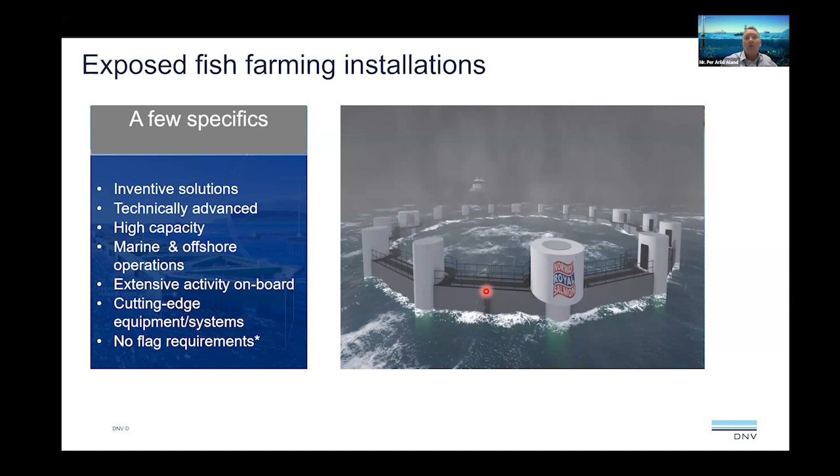Just to set the scene more firmly, let me share the main categories of these new solutions we see being brought on. It's convenient to split it into 3 categories: open, semi-closed, and closed. The open ones are framework made of steel, with net panels to enclose this and keep the fish in one place.

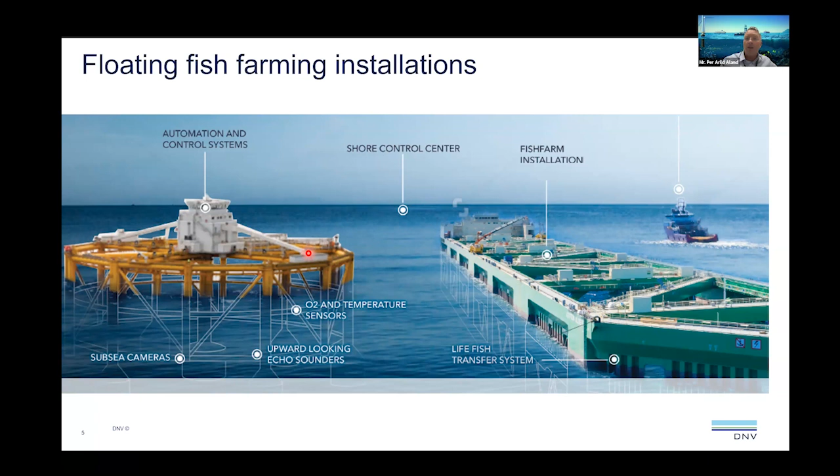Our main focus is split into 3 main areas: the asset integrity of the installation itself, the health, safety and environment of the people working on board, and last but not least, preventing fish escape - fish control. What we've seen to be very efficient is implementing the well-known maritime safety regime and execution model, very often called classification, a methodology we've seen work very efficiently in oil and gas and regular shipping.

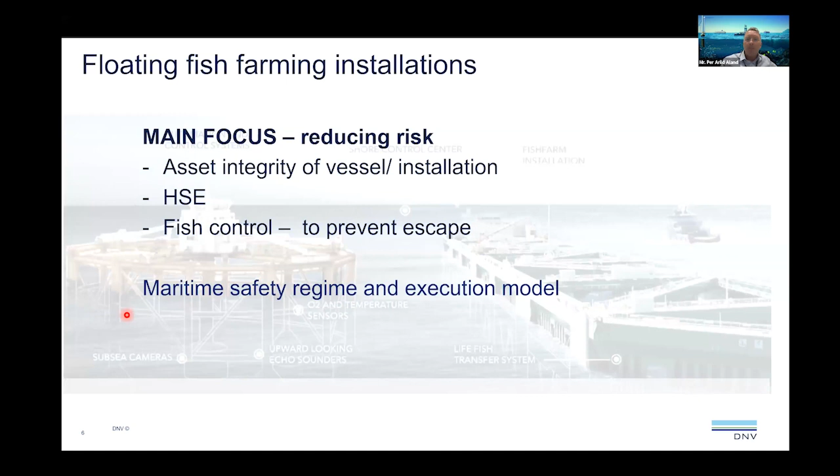To go into more detail on these 3 categories, let me highlight a few main points. Number 1, installation and the unit itself. Several of you may recognize regular items from maritime classification, such as structural integrity, stability, mooring, machinery, and electrical instrumentation installed on board. Both DNV and I believe other class societies have prepared a rule set - ours is called the floating fish farming units and installations. The magic number is 0503, which is basically taking all our experience from the last 60 years of offshore maritime operation, condensed and tuned for fish farming into an 80-90 page rule set that has shown to be fairly successful in the industry these days.

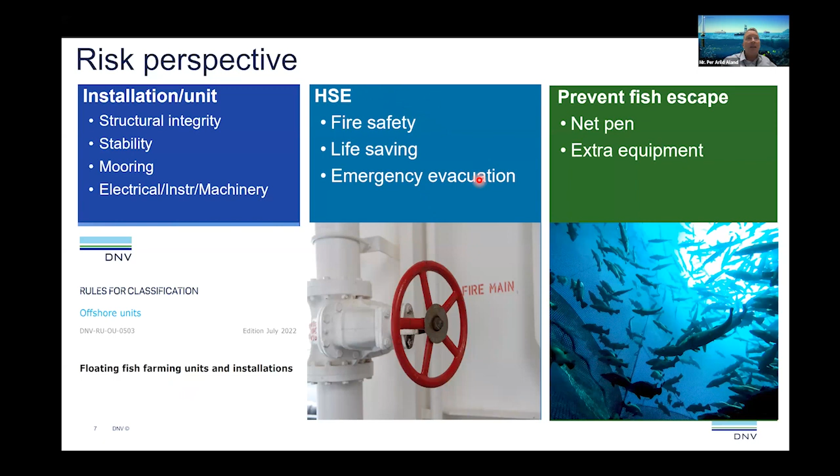The next one, HSE, which covers fire safety, life-saving, emergency evacuation, and other crucial HSE items for working and living on board a maritime installation. The requirements we use there are, as you may be relieved to see, the regular maritime codes issued by IMO, International Maritime Organization, codes such as SOLAS and LSA codes. This is also very convenient for the industry and the supply chain, as they are very comfortable with this well-known methodology and approach.

The last one, preventing fish escape, where we go further into the net pen and what we call extra equipment, meaning equipment on board that may cause fish escape, even though it's not directly related to the aquaculture itself.

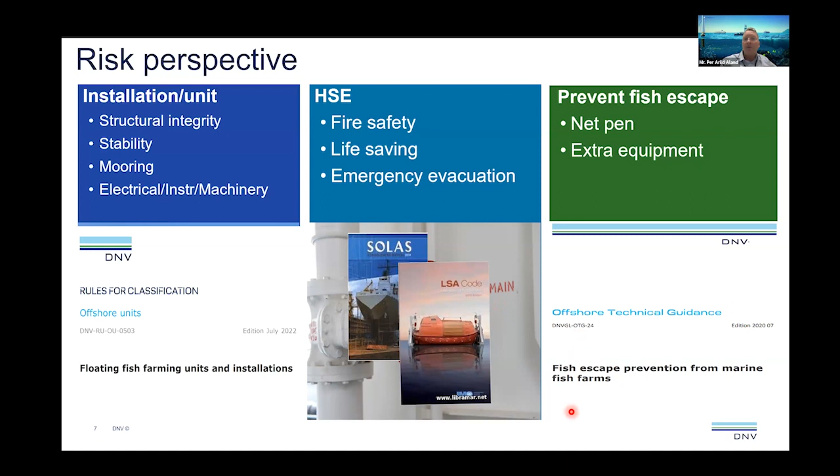We have an OTG, Offshore Technical Guidance 24, on fish escape prevention from marine fish farms. So in this sense, we feel that we have covered the essentials.

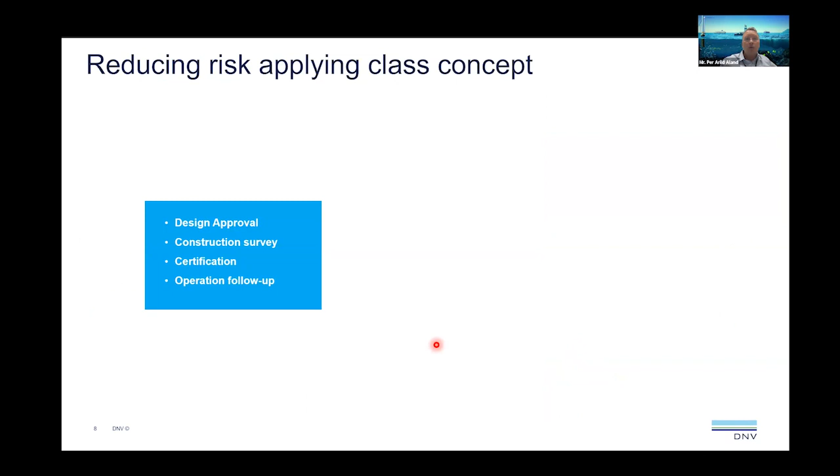Let me also share with you the main activities and milestones in this maritime model, starting with design approval. Somebody looks through the drawings and checks that the design and arrangement on board are according to rules and regulations, everything from safety to steel strength and material grades.

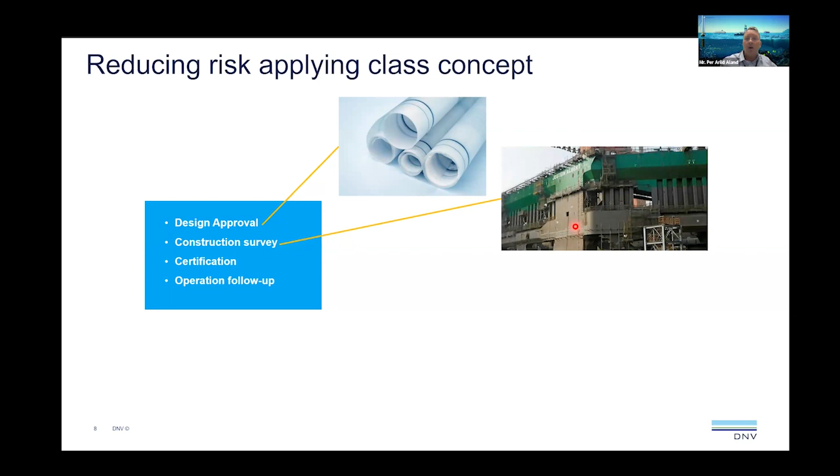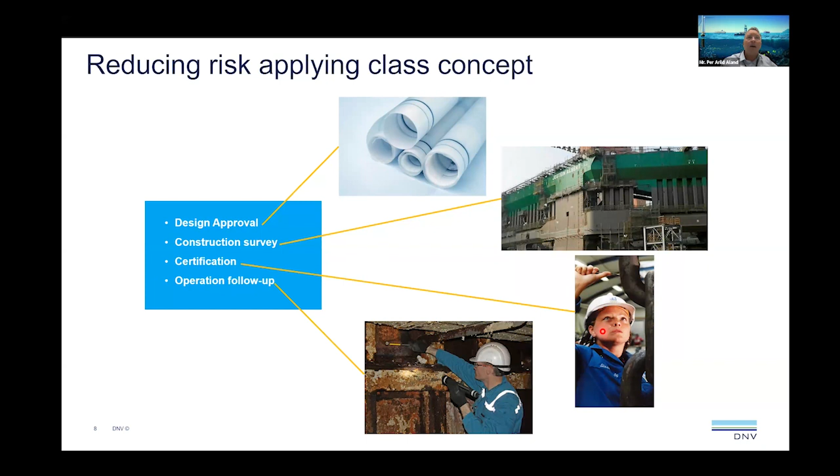Then, of course, we do a construction survey at the yards, making sure that they actually build what is on the drawings and that special processes such as welding, heat treatment, and surface treatment are taken care of. Also making sure that certified equipment, crucial equipment being installed on board, is certified is important. And the last item is the operational follow-up, where we, at regular intervals, go on board and advise and log the condition of the installation.

And then, of course, you have a feedback loop. I want to put your attention to what we call certification, CMC, because there's sometimes some confusion in the industry about this. Let me give you a few examples.

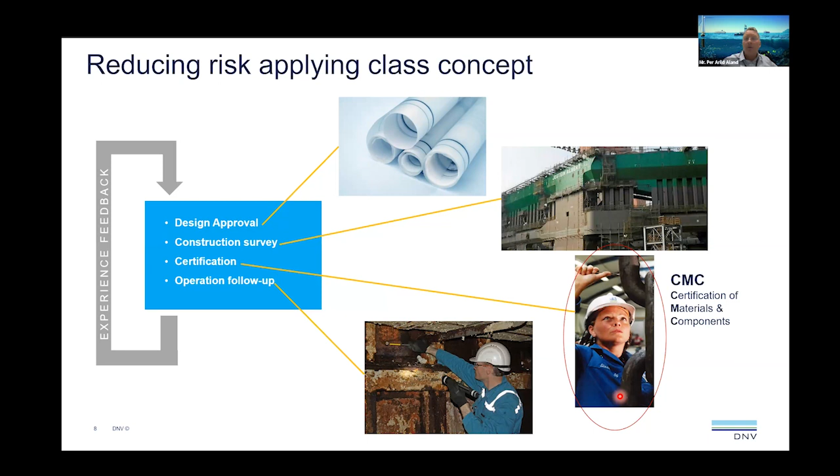For example, a mooring chain needs to be certified due to the fact that it supports mooring, it supports the asset integrity itself, and it supports station keeping for fish control, because if the installation drifts off, it may collide into something or go to a grounding and be damaged, and the fish will escape and you will have a disaster.

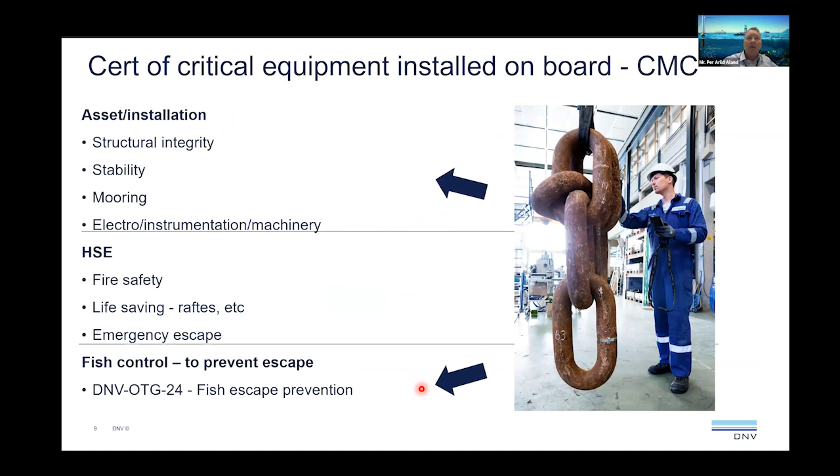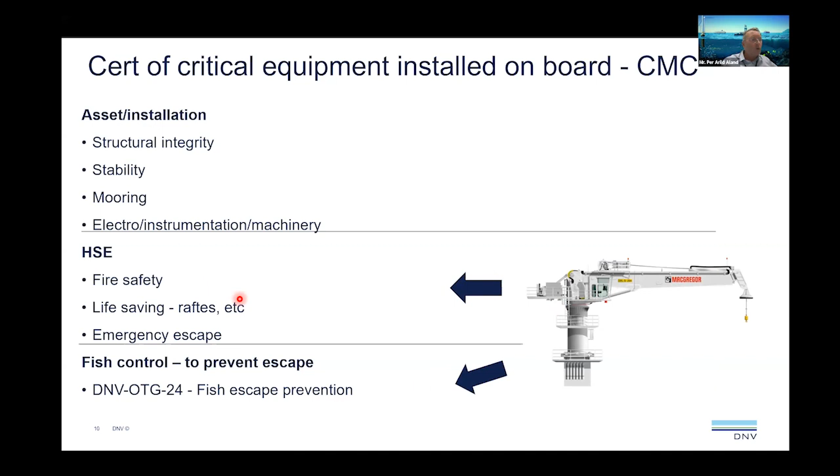Another example, convenient to bring up, is cranes and lifting appliances. They need to be certified due to the health and safety of people working on board, because you don't want a collapse, or you don't want to lose the load and damage people working there. At the same time, you don't want the machine to collapse, fall into the pen, and cause a fish escape. So the certification of these crucial items serves several purposes.

So I find it convenient to share with you some of the projects that we expect to be put online this year and next year, just to illustrate what kind of movement we have in this industrial segment.

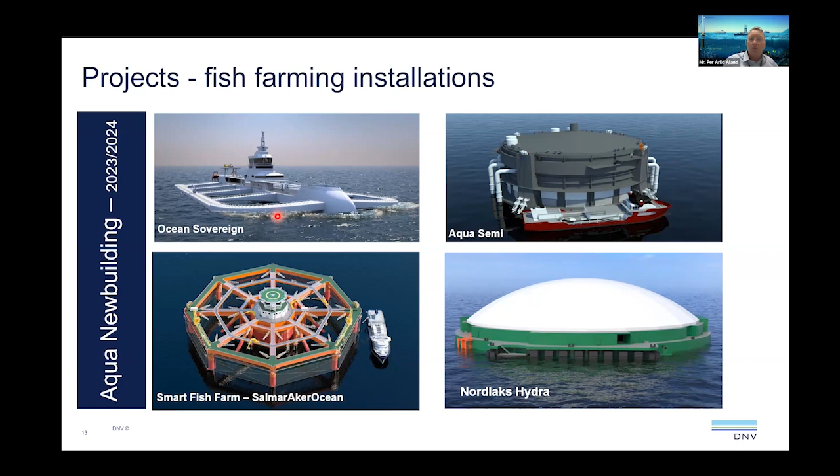To round it all off, I'm going to bring up a few reflections on the road ahead, what we find crucial for future success of this advanced fish farming. That is, of course, to get control of the infrastructure. We have done a lot of work there and feel that we have covered quite a lot of ground already. Secondly is the digital solutions - making sure that the complex and integrated digital solutions are trustworthy and reliable.

And then, of course, another three main items that we find very crucial for future success: biodiversity, impact on and sustainability of the marine environment, and animal welfare.

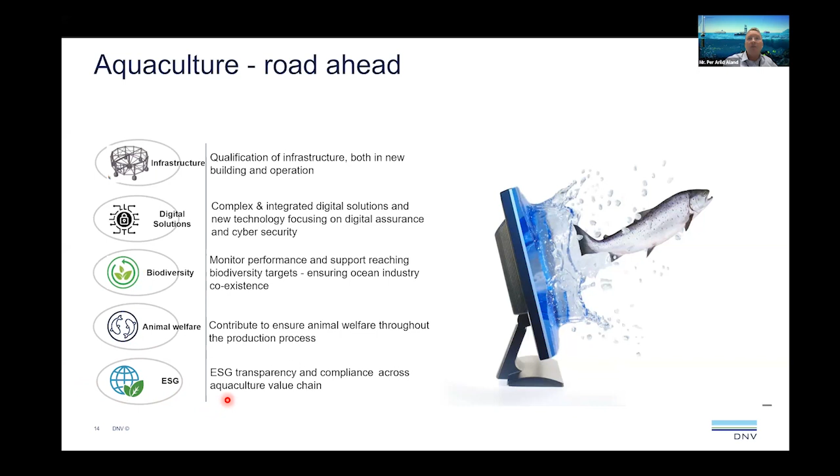It's good for business to have happy fish. It's also good for market, and it's good for the fish itself, of course. And then in Europe, we have ESG, environment, social, governance, which calls for transparency and reporting regarding several things. Last but not least, I want to tap into the digital aspect of things. As we see it, it's the smart game, and the winner of the smart game will prevail in this industry.

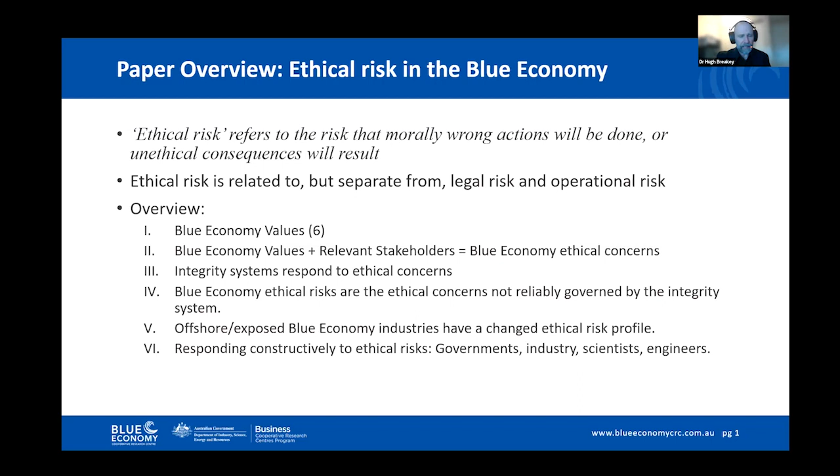We'll look at the ethical risks that we might think of as being introduced by ordinary blue economy industries, and then we'll have a bit of a think about how offshore and exposed blue economy industries might change that ethical risk profile. It might improve things in some respects, but it might make us more vulnerable to concerns arising in other quarters. And then what we might do to respond constructively to ethical risks. There's lots of different things that we might do, and they depend a little bit on who we are. But governments, industry, scientists, and engineers all can have a role to play in mitigating and responding to those risks.

So I'll just kick things off by listing the 6 Blue Economy ethical values, ethical principles that it seems plausible to think are relevant when we're doing work in the blue economy. These have come from a variety of different sources in our work on the project over the last couple of years, including interviews that we did, ethical theory work that we did, but also a type of meta-analysis looking at what was out there in the existing scholarship on blue economy ethics and social license.

So the 6 ones that we've coalesced around - number 1, and probably very few surprises here, I think: environmental protection. Blue economy activities should protect things like sustainability, biodiversity, ecosystem function.

Number 2, stakeholder participation. Community knowledge and engagement should play a role in blue economy decision-making.

Number 3, fairness. Opportunities, risks, impacts, costs, and benefits should be fairly distributed across stakeholders. Harm prevention - things like human rights, animal welfare should be protected and respected.

Beneficence, this is probably the only technical term from ethical theory that I'll use - this is just doing good in the world. So blue economy activities should do things like deliver good outcomes, including quality food, safety for workers, prosperity for local environments, employment for local workers - all of the things that are positive reasons why we think the blue economy is worth us having and is worth us protecting.

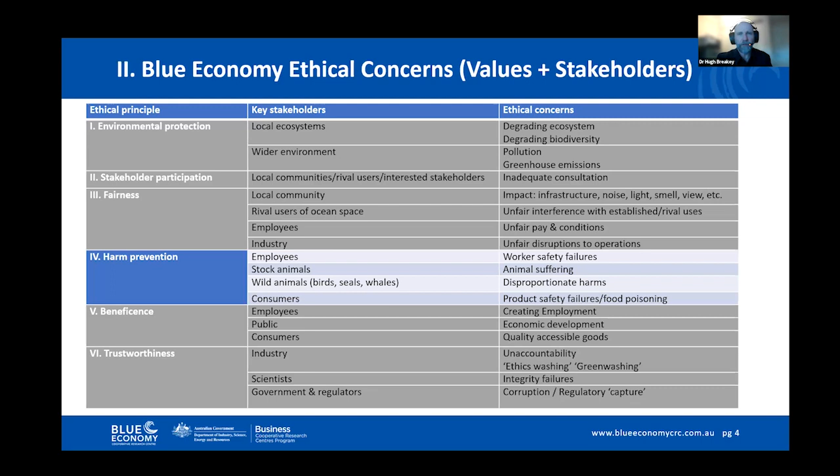And so we can run all those ethical principles through all the key stakeholders, and we wind up with what's usually a very long list of ethical concerns. Once we have ethical concerns, what then? Well, we tend to want to fix ethical concerns, and we usually do it in a way we can describe as being an integrity system - a mutually supportive network of ethical standards, legal norms, institutions, and incentive structures that combine together to facilitate publicly stated goals and limit the temptation or opportunities for wrongdoing, including things like corruption.

I mentioned corruption specifically because integrity systems were developed by my co-author, Professor Charles Sampford, as he analyzed what had been done in the post-Fitzgerald reforms in my home state of Queensland, which during the 1980s had endemic political and police corruption. It was the Fitzgerald reforms that were the first time this type of system was used to try and combat the extent of corruption in my state.

So what's it amount to? Well, the integrity system includes looking at multiple levers to human conduct. Why do human beings do stuff? Well, they do stuff for a whole bunch of different reasons. They're often motivated on the basis of economic incentives and what will work for them and make them money.

They respond to legal rules and the threat of formal punishments. What they do is often shaped by the affordances of the organizational design in the institution where they work and operate, and also by ethical norms or whatever personal values they bring to the table that will talk to you about the type of things they want to pursue and the things they will not do on the basis of their ethics.

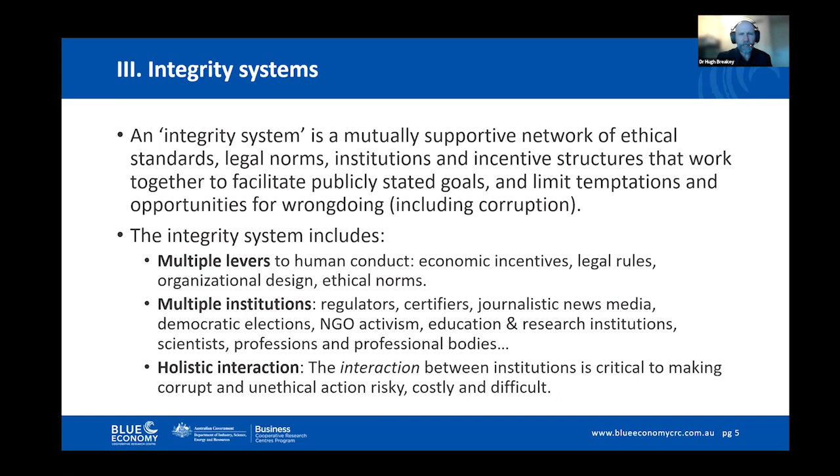So what might ethical risks look like then in the blue economy? And obviously I'll only be touching on a few here. It's worth at the outset to emphasize that everything has ethical risks. There's no industry, no scheme of human behavior or practice that doesn't have ethical concerns that it struggles to deal with, and that therefore constitute ethical risks.

The blue economy inherently invites some pretty serious ethical risks. It's a dynamic and innovative industry. It has social and environmental impacts, and it operates on public resources. That's just a recipe. Those three factors are just a recipe for the fact that things can go wrong.

But it also has this problem. It suffers from significant governance challenges. It's hidden away from media and often from community. It's far away from normal governance bodies. Sometimes there are unclear jurisdictions and laws.

It's operating in a fluid environment where actions in one place have effects far away, and sometimes it's operating with unknown interactions and impacts on ecologies that we don't understand very well. So all of those things together mean you have ethical concerns that are arising and that can be tough to deal with from a normal integrity systems point of view.

So what happens if we then move the blue economy activities, if we're imagining them to be relatively near shore and local to communities, we move them to more offshore, more exposed, more high energy waters? Well, that's going to change the activity's ethical risk profile, and it might change it in a good way. In fact, you might even say one of the main reasons we have for wanting to move things further offshore is precisely to change that ethical risk profile.

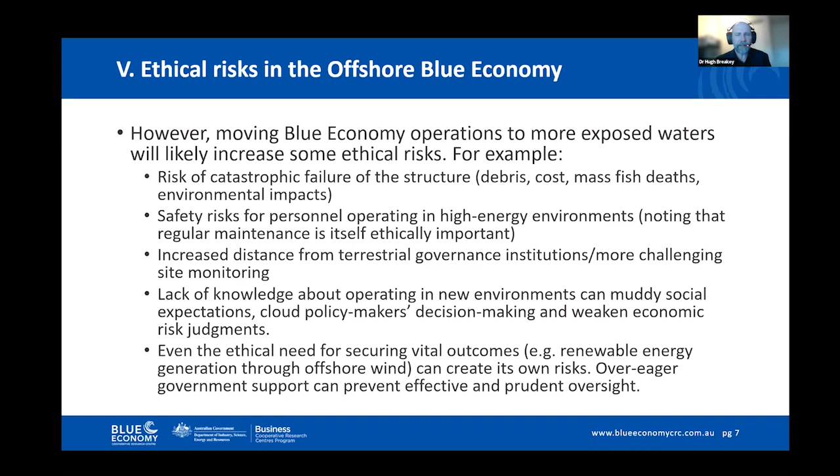So that's just to give you a little bit of a flavour of what the changed ethical risks might look like. I'll just zip through now how we might respond to them. Different agents will obviously have different available responses.

Governments can curate the entire integrity system, changing policy and law. Industry can directly control their own activities and practices. Scientists can respond to those knowledge deficits I was talking about a moment ago, developing and sharing knowledge, helping us better manage risks and expectations.

And finally, engineers can develop new technologies, making it more likely that the system can deliver the values that justify it while reducing unwanted impacts. They also improve ergonomics, that interface happening between human systems and environment. By doing so, they can promote ethical rather than unethical outcomes.

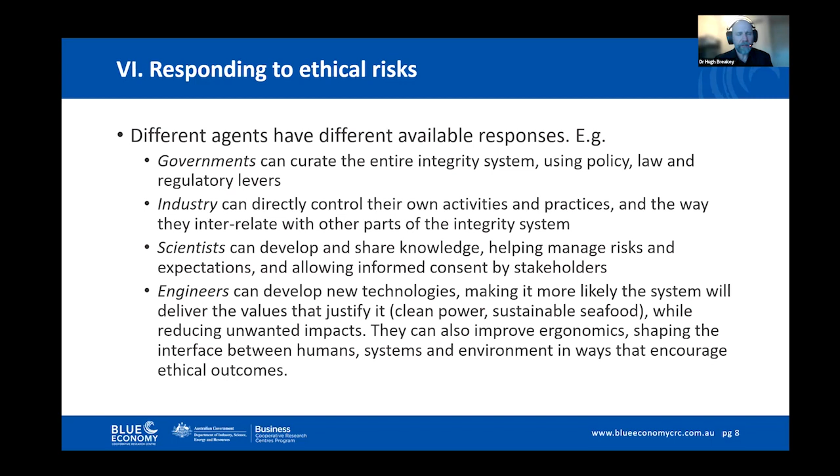Thank you very much for the invitation, and as always, a pleasure to be here in this webinar talking to you. And it's connected to my presentation, is very much connected to what we have seen in the two previous ones, because what we have done here with this work, titled the determination of mooring load levels on a cage designed for exposed aquaculture in Chile, it's basically developing a joint industry project helping those people in the industry to reduce the risks.

So here it's basically a pilot to test new technologies in order to reduce the risk for the time that we actually get in exposed waters. So just to give you an update, an outline of my presentation, we're going to talk about the aquaculture in Chile.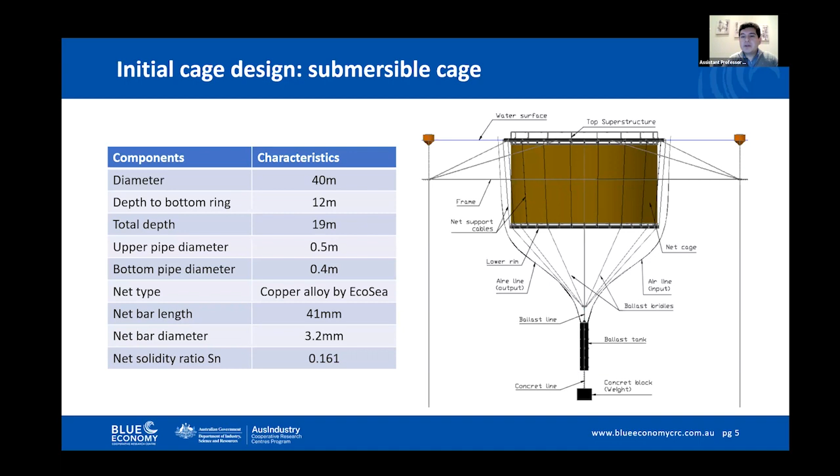Because the conditions for which we are designing are intended for, it's projected that 5 meters below the water depth is going to be enough to get out of the area with the maximum energy that we're going to have.

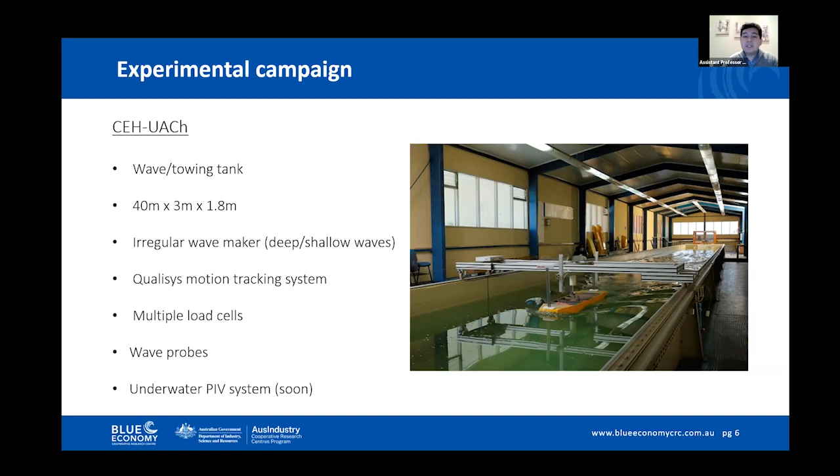So in order to test and reduce the risk, we carry out a series of experiments first in a towing tank that we have here in Chile at the Universidad Austral. It's a small towing tank, 40 meters length, 3 meters width, and 1.8 meter water depth. We have equipment to measure the motion of the floater, forces, and the wave conditions we want to test. Soon we're going to have an underwater PIV system to see all the structural flow in underwater systems.

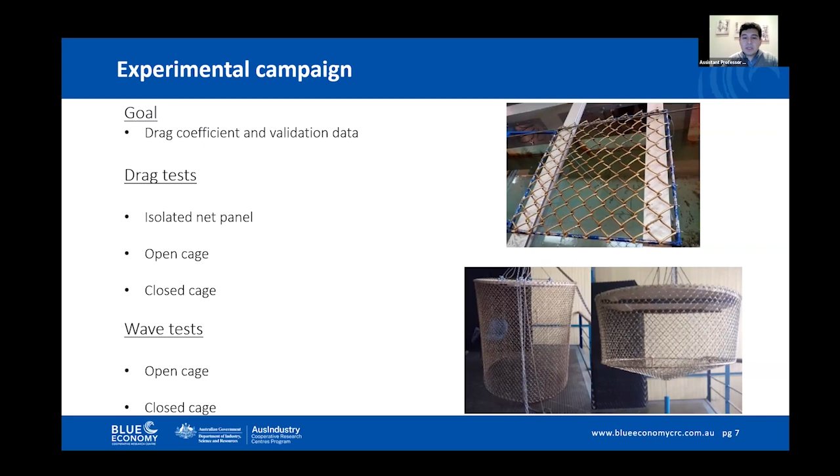Then we carried out drag tests for these models of cages, all intended for the calibration of the numerical codes we are using. And finally, we have some wave tests, again for validation.

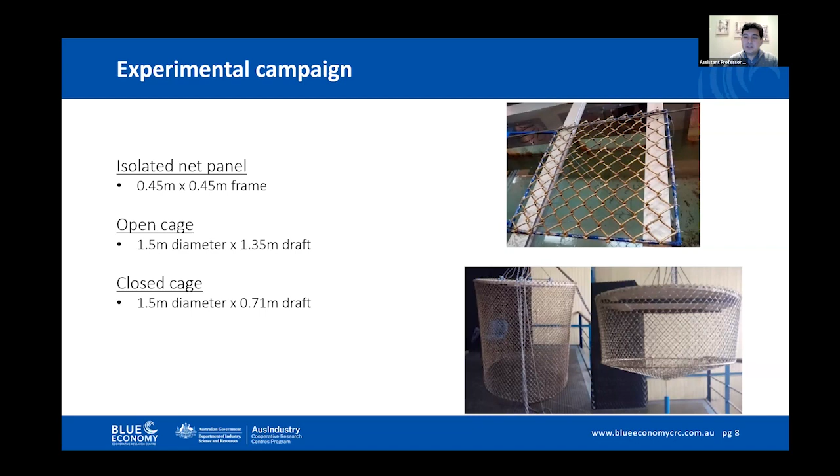The net panel we have is quite small, but gives us enough information. Then the open cage and closed cage. The open cage is simple, just a cylinder of the net we are using, so we can test in different conditions and have pure drag or pure wave load. In the closed cage, it has dimensions that mimic the real cage, and we include a weight at the bottom because we want to see the dynamic interference between these two bodies, the cage and the weight at the bottom.

When we carried out the experiments, we made sure to test up to the current speed we already have here in Chile, 3 knots, so we went up to 1.5 meters per second. We can see that the drag coefficient we have is pretty typical for these sort of systems for cylinders at these Reynolds numbers. Here it's approximately 1.1, the maximum drag coefficient that we obtained.

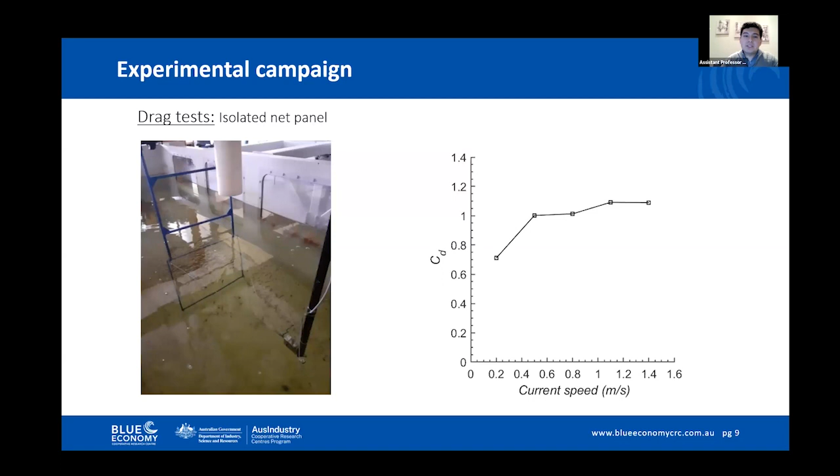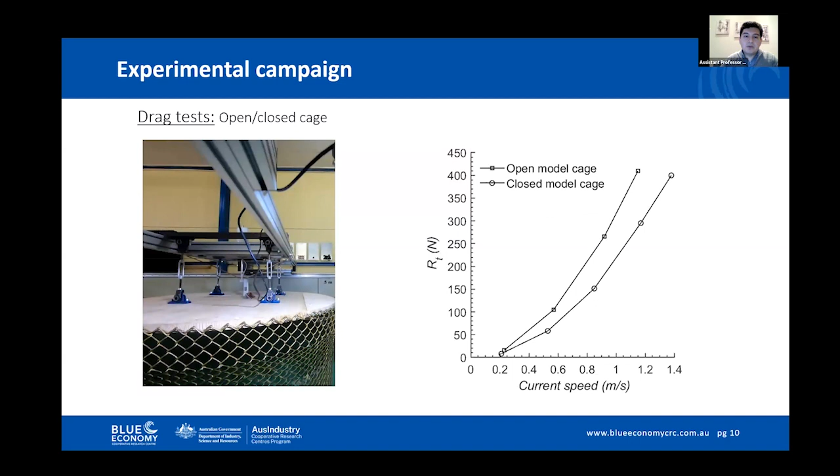This drag coefficient was then fed into the numerical calculation we did in the pre-feed stages of the cage design. For the drag test with the simplified cages, we installed the system in the tank with this double hinge connection, so we get pure drag tests, carrying out experiments up to the maximum current speed we can impose per carriage in the tank. All of this data is now being used for the calibration of our numerical models.

One important thing, and the novelty of this study, is that there is no information reported in the technical literature about the deformation of these sort of nets, because of the stiffness, the weight, and the geometry, we observe the deformation is actually not what you'd expect with a traditional net. As we increase the speed of the current, in this case the carriage in the tank, we see the deformation of the front of the cage tends to go to an angle, and the maximum angle we registered was 37 degrees. In a traditional netting at this velocity, well over 2 knots, you'd see the net at the surface of the water. But here we see an effect pretty much like what happens with a chain when it gets locked, sort of a locking effect with the netting, and this is valuable information for the numerical modeling.

In the wave test, we carried out tests under operational and extreme conditions, measured based on the measurements on the site. For the closed cage, we see a particular behavior in the extreme condition, an increment in the loading, pretty much like a snap load effect. This effect was also seen in the field, and at the beginning we didn't know how to explain it, but looking at the lab results and images, the issue was that the cage and the weight at the bottom were working as a double pendulum system, and the motion of the ballast tank at the bottom actually induces loads on the mooring system.

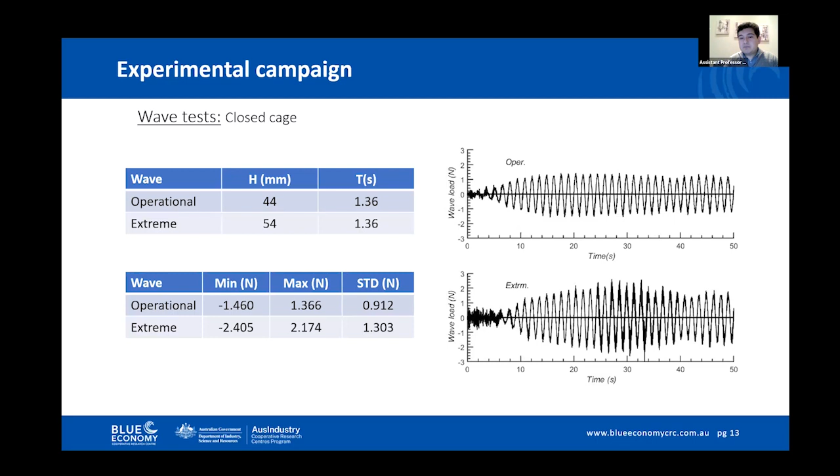This is one thing we had to look at in the second stage of the design of the cage, because it's actually increasing the loads on the mooring system. In the pre-feed calculations we did before checking all the data we had at the lab, we had to put the cage in the water, and we did this calculation to find the maximum load on the mooring system, because in those mooring lines we're going to install the load cell to get the data from the field.

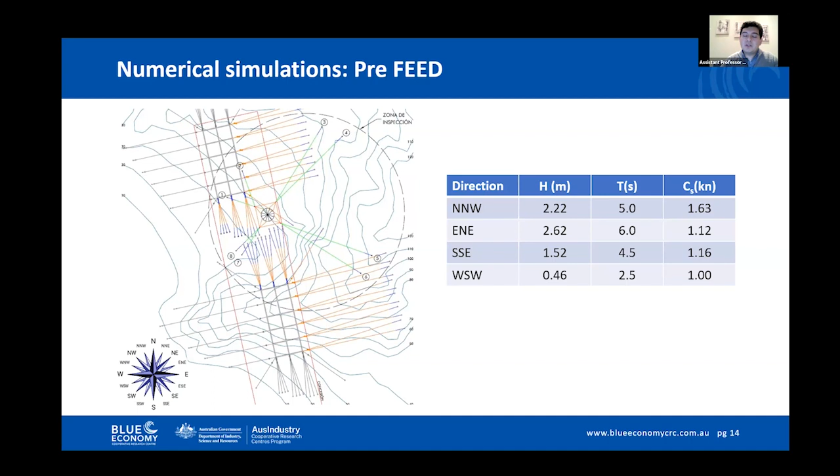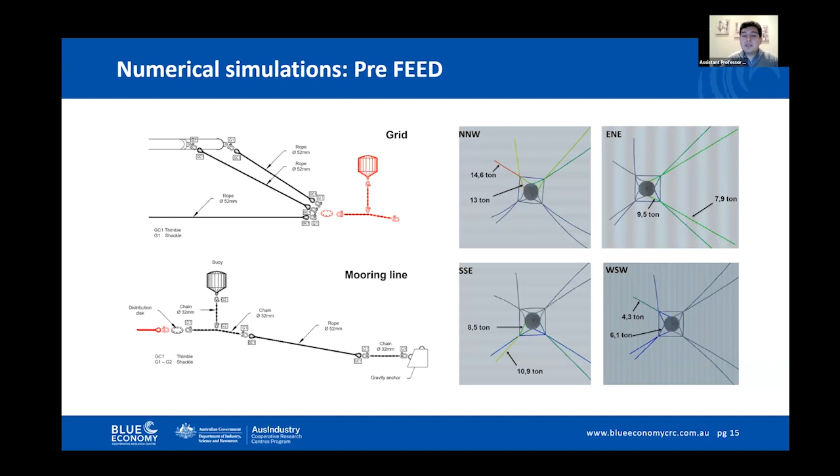All of these conditions were calculated based on the Norwegian code, where you basically use regular waves to get the maximum loading on the mooring lines. When we got these values, we designed the mooring system, and as you see here, it's pretty traditional rope and chain, and in the case of Chile, it's quite common to use gravity anchors. All this information gave us the maximum load condition, the maximum tension we're going to have on the cage, but now we want to test this information.

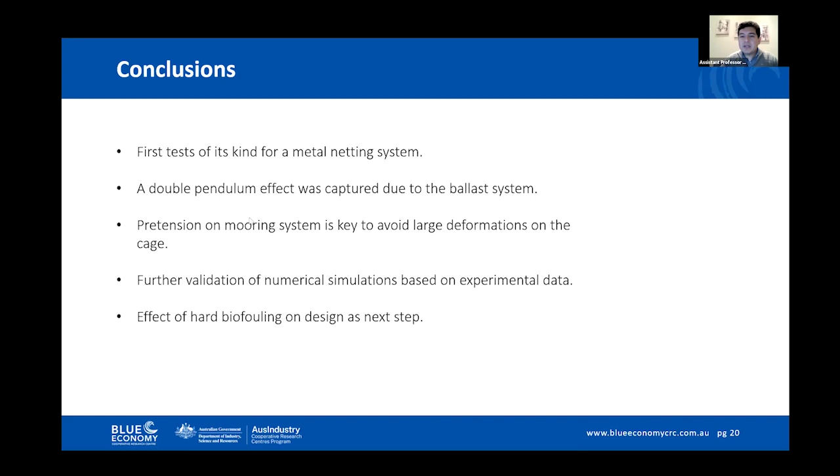Thank you very much, Christian, for your interesting presentation. I'm sure there will be lots of questions later on given those interesting insights and findings from your experiment and field work as well. Yeah.

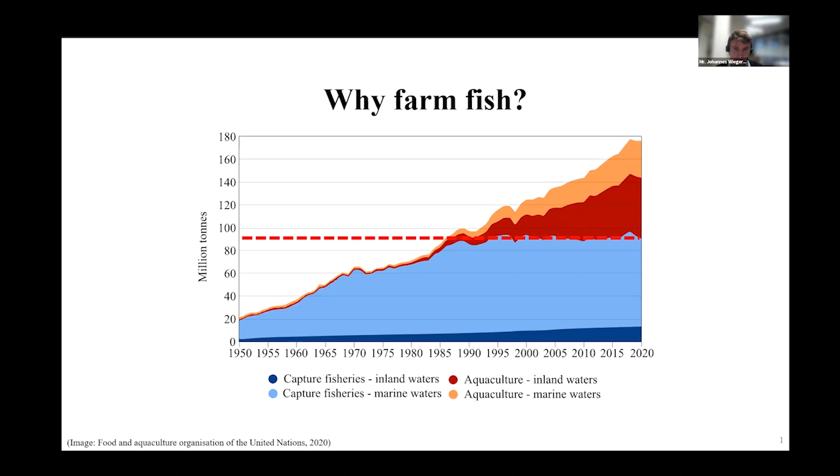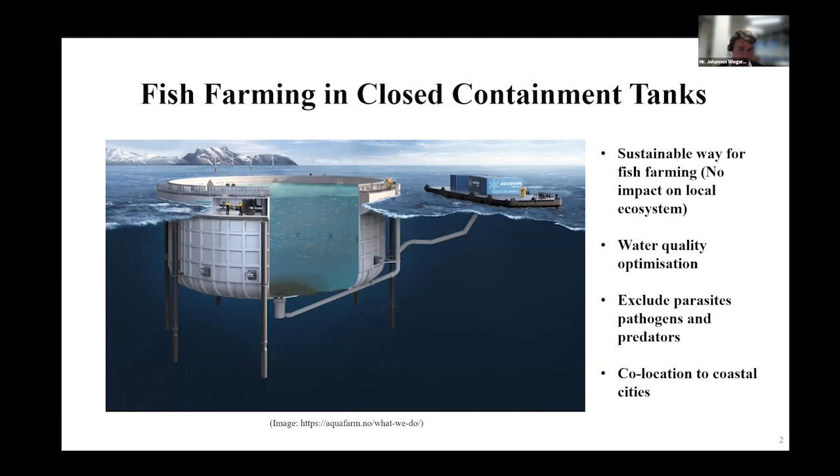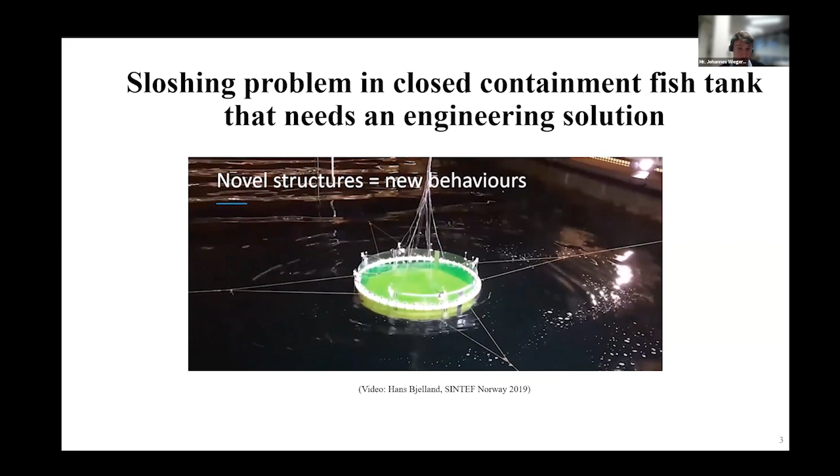So in order to make this a successful fish farming industry, we need to address the sloshing problem. While sloshing is not a new problem, as you see it in a lot of industries worldwide, sloshing in aquaculture tanks imposes additional boundary conditions because we've got live fish inside. So we have to be mindful of that.

So when designing a slosh mitigation solution for closed containment tanks, we want to have minimal internal structures because we want to optimize for the free swimming space for fish. We don't want a lot of horizontally submerged surfaces, as this is where solid waste can accumulate.

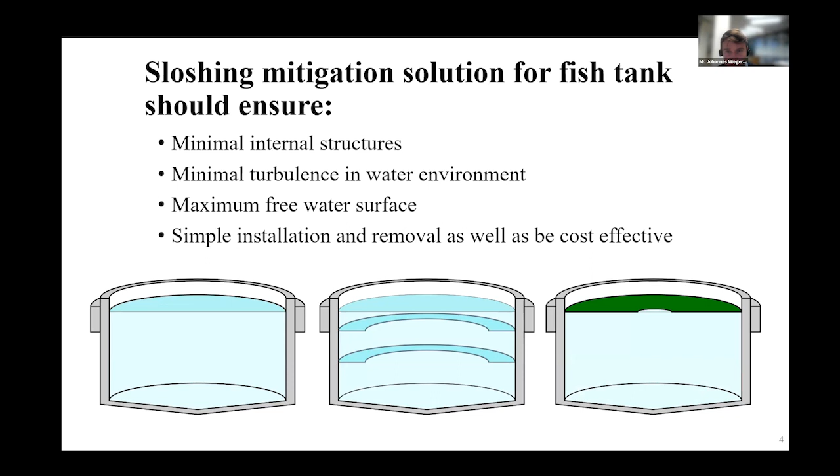Also, turbulence created with baffles, for instance, can create a lot of chaos in the water. There is a free surface requirement for direct sunlight, free surface feeding, and day-to-day inspections, and yet it needs to be a simple concept or a simple solution that is preferably modular, which can be removed and needs to be cost effective. So in my PhD, I developed a solution and we call it the slosh suppression block.

And you see it on the right here. It's the green annular ring that is fixed to the internal, which is fixed internal into the containment. And it's got three main characteristics.

So the top of the slosh suppression block is flush with the internal water level. The width of the slosh suppression block is wide enough to create an overtopping surface for fluid to overtop onto. And the depth of the slosh suppression block is high enough to prevent air trapping underneath as we slosh.

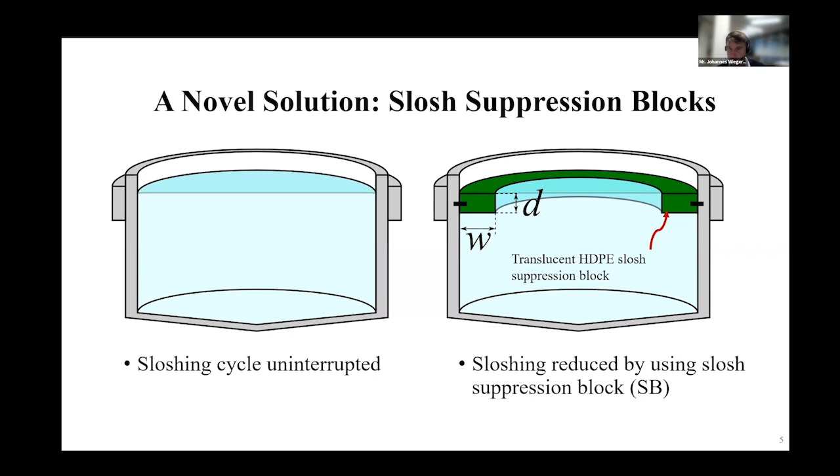So the proposed material that we can use to fabricate these slosh suppression blocks is HDPE. It's a well-established material in the fish farming industry. It's non-toxic, it's got excellent strength characteristics as well as biofouling characteristics.

So the key principle of mitigating sloshing with a slosh suppression block is that we modify the vertical flow structure at the internal face of the slosh suppression block to a horizontal flow by overtopping. And this creates two things. It reduces the sloshing amplitudes at the free surface, and it prevents the progressive buildup of sloshing energy in your fluid domain, so you prevent resonance.

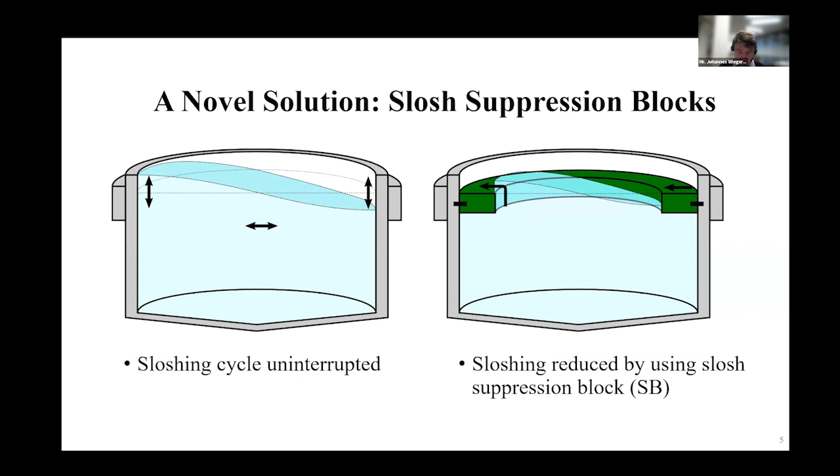Also, as fluid re-enters the main fluid volume after it has overtopped, you see that it has got primarily a horizontal component which keeps disturbances to the main fluid volume to a minimum, which creates a calm environment for the fish below.

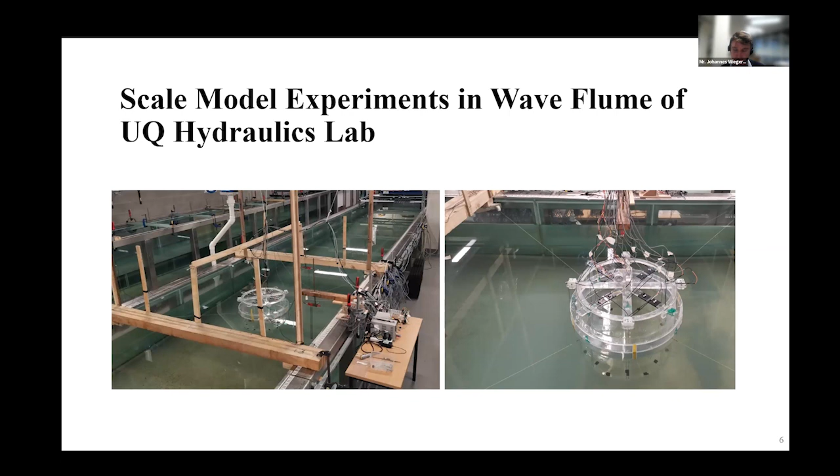So to test the effectiveness of the slosh suppression block that we developed, we did various scale model experiments in the UQ hydraulics lab facility, and we were primarily interested in the engineering aspects of the problem, which were the containment tank motions, the internal fluid oscillations, so our sloshing, and the disturbances to our main fluid volume.

So the test configurations that were included were a reference case, which is our no slosh suppression block, and then we've got two cases with a slosh suppression block with the overtopping with different contraction ratios, W over R1 equal 0.25 and 0.5. And for each case of the slosh suppression block with overtopping, we had an additional case without overtopping.

So we extended the internal face of the slosh suppression block beyond the free surface and made sure it was high enough such that fluid did not overtop. And this gave us a means to assess what the effect of overtopping is.

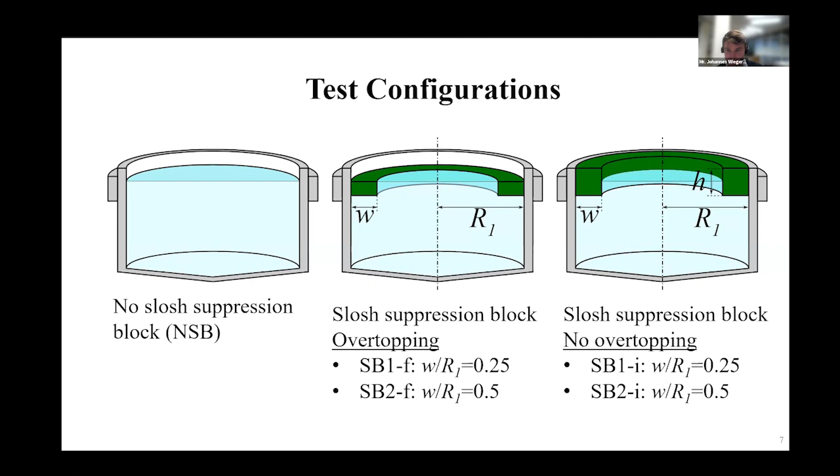And here you see a visual comparison between overtopping and no overtopping. And if you pay attention to the right video image, you can really see that the water stands up along the faces of the slosh suppression block without overtopping. And on the left, you see that the fluid surface has a significantly calmer appearance.

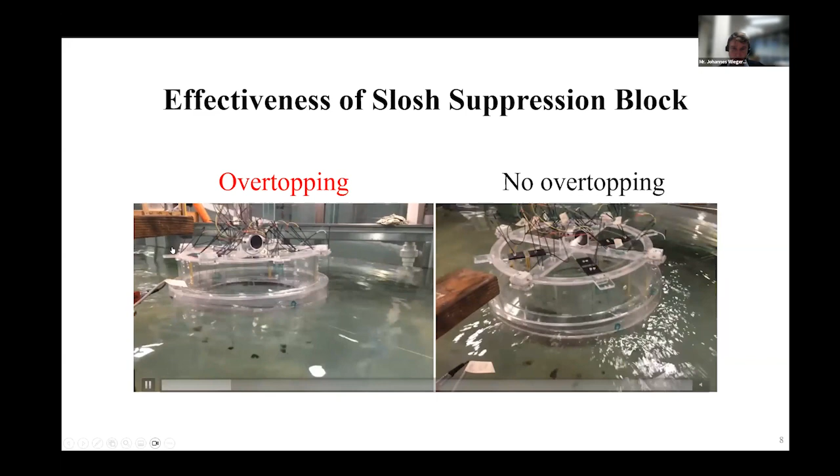So we tested this for a range of wave periods and values of lambda over d, where lambda is equivalent to your wave period. And each test configuration is indicated with a color code. We tested for different wave steepnesses in regular waves.

And what you see is that by adopting a slosh suppression block into your fluid domain, your natural sloshing periods reduce. And you might say, hey, that's great. Now you've shifted your problem to a lower wave period.

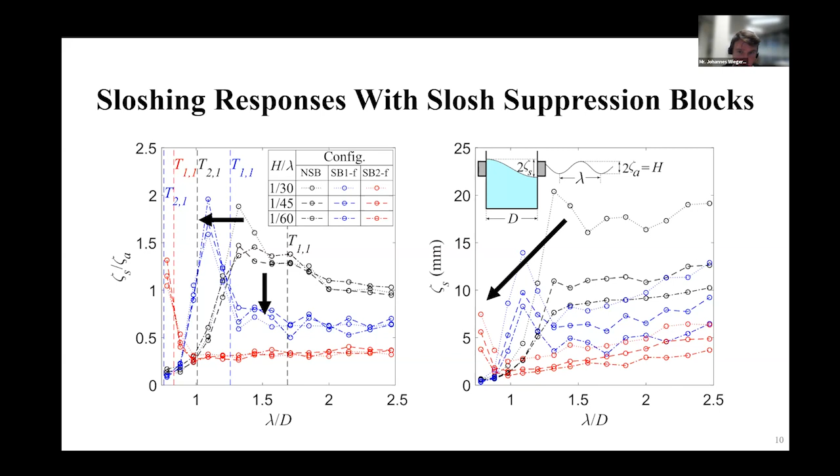However, in an absolute sense, which you can see on the right, you see that your sloshing amplitudes reduce. Also, what you see is that for a greater range of wave periods, so larger values of lambda over d, your sloshing amplitudes reduce. So by sacrificing moderately higher sloshing amplitudes at lower wave periods, in an overall wave period range, we reduce the sloshing amplitudes.

So to get a notion of the disturbances to the main fluid volume, we injected dye while running the tests. For the comparison here, we're going to look at 4 different cases: one with no slosh suppression block, one with a baffle, which is a conventional way sloshing is mitigated in oil tankers.

The bottom cases are the 2 cases with different contraction ratios with the slosh suppression block. While looking at this video, note that dye disperses by itself when injected. What's interesting is that with the baffle case, the dye spreads fairly violently and includes the whole fluid domain in the energy dissipation process.

And with the slosh suppression block that we developed, the disturbances to the main fluid volume remain relatively shallow, which creates this low energy environment for the fish below.

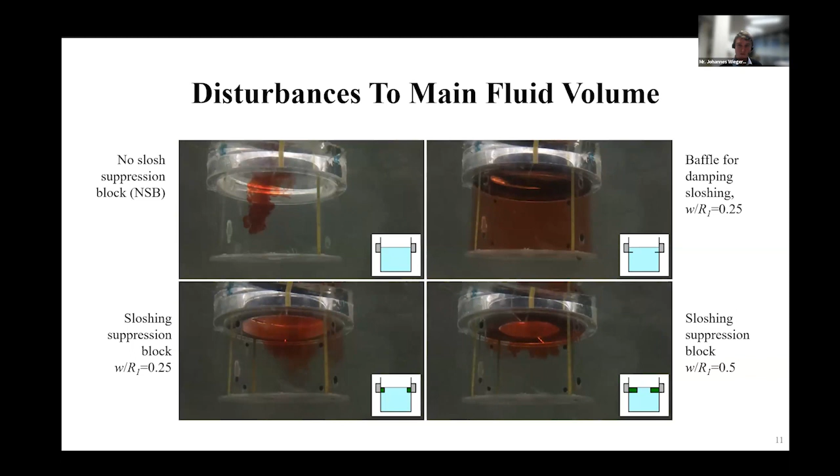So in conclusion, the slosh suppression block dampens sloshing via overtopping, which will prevent the progressive buildup of resonant sloshing. Hereby we preserve a calm environment for the fish below, and it is a practical, simple, and cost-effective solution that can help accelerate the development of floating closed containment aquaculture industry in the marine environment.

I want to finish my presentation with a recommendation for future research, because we've very much talked about the engineering aspects of it, like the tank motion, disturbances, and sloshing. However, we've got live fish inside.

In doing research towards floating closed containment tank systems in waves, we make the assumption that fish have a certain tolerance to tank motions and sloshing and these disturbances before the aquaculture is negatively impacted. So in order to make this a successful operation, we really need to also address and know what the limitations are in terms of fish well-being. This needs to be quantified in future research, and that might be fish species dependent.

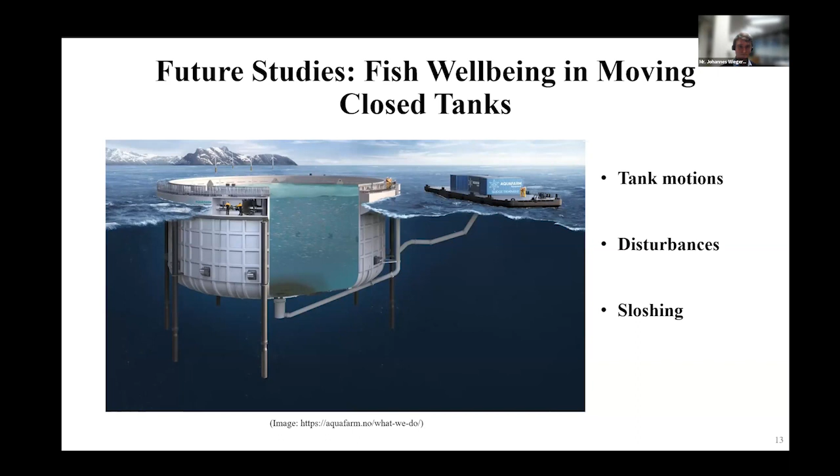With that, I want to finish my presentation and thank you for your kind attention. Thank you very much.

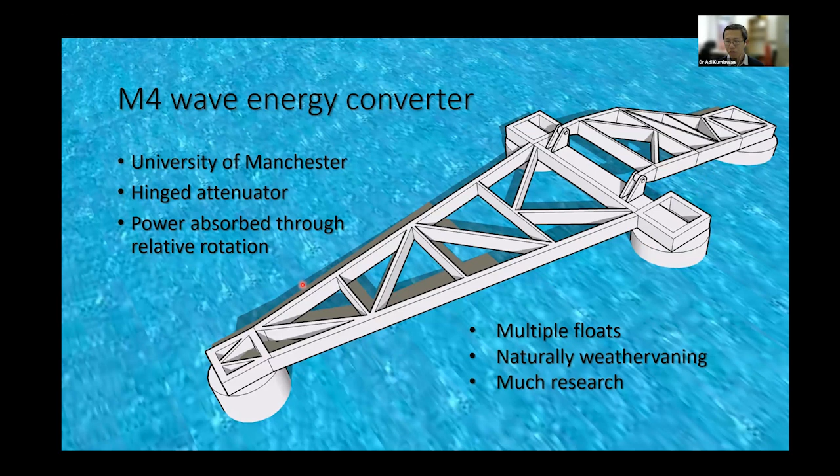We have done numerical modeling of this particular device, and the model assumes linear hydrodynamics, so the response is proportional to the wave amplitude. The model starts by taking unidirectional wave as input, but we have also extended it so that it can also take spreading into account.

The model can output the motions of the device in 7 degrees of freedom, so motions along the X, Y, and Z axes, as well as rotations about the same axes, plus the rotation of the back body relative to the front. It also outputs the power and is able to give the loads at the hinge.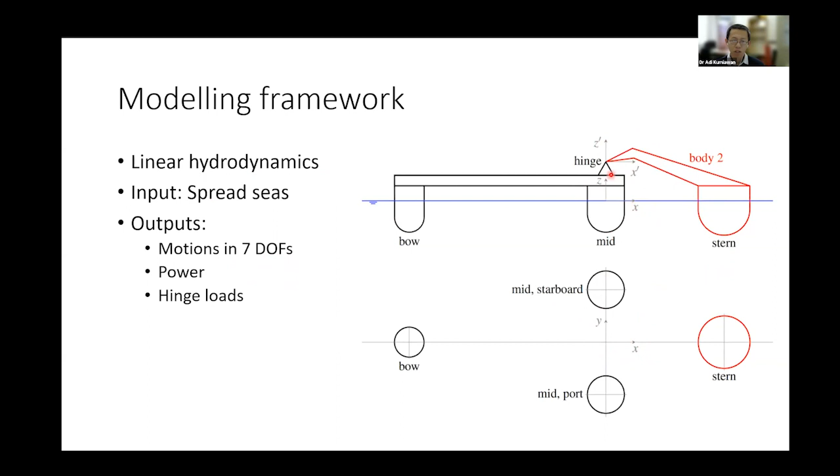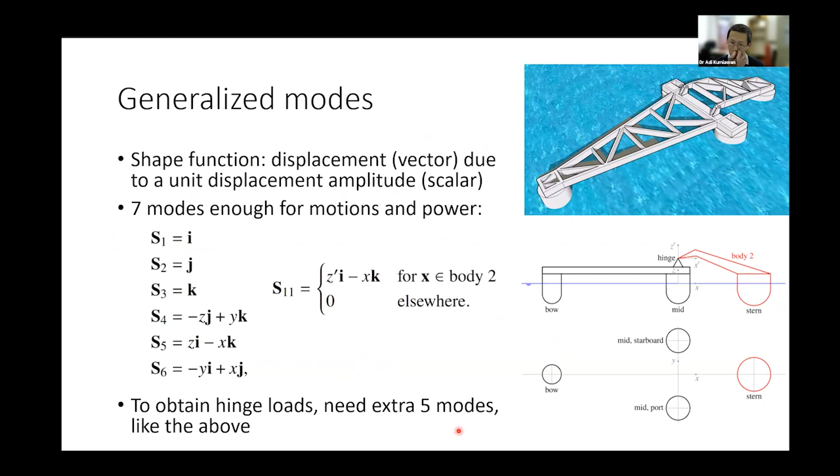The framework we are using is called generalized modes, which essentially means the motion of any point on the device can be expressed as a superposition of shape functions multiplied by a displacement amplitude. To get the motions and power, 7 modes are required. But because we are also interested in getting the hinge loads, we need another 5 modes, making 12 modes in total.

I'll discuss this briefly. We start with this standard form of the equation of motion. Basically we have the mass here, the added mass, radiation damping, the power takeoff damping, the stiffness, and the body velocities, which we intend to solve, and the wave excitation force here.

With the generalized mode approach, the advantage is that all the elements of the mass matrix are given by this form here. So knowing the shape functions, we can work out each element of the mass matrix. Similarly, for the hydrostatic stiffness matrix, we can also make use of the shape function. So everything becomes a matter of routine work.

To get the added mass and radiation damping as well as the excitation force, we use WAMIT, which has the option to specify the shape functions and output all these parameters corresponding to the shape functions.

Having all the terms now established, we can solve this equation for the body velocity. We do that with all 7 modes, and then once we solve that for the 7 modes, we can plug back into this equation to get the loads at the hinge.

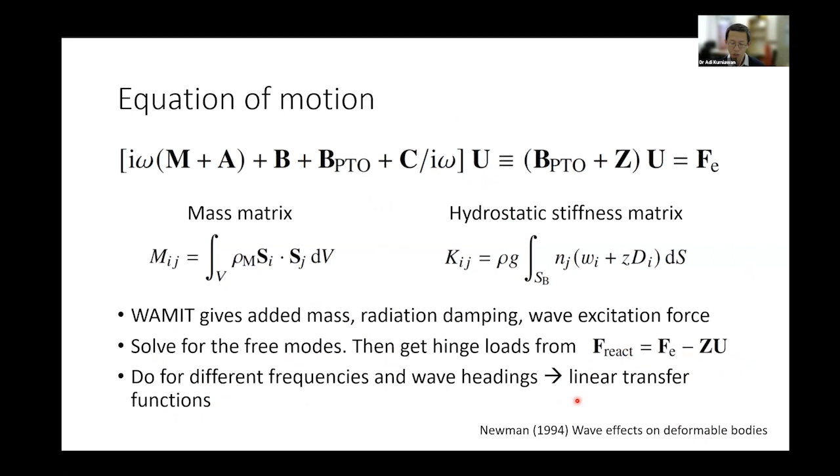We do this for each different frequency and wave heading, so we get the linear transfer function for a response of interest, which can be motion, load, or etc. With the linear transfer function given here, as well as the information on the wave contained in the wave spectrum, we can do many things, like calculating the response spectrum for a given frequency and wave direction.

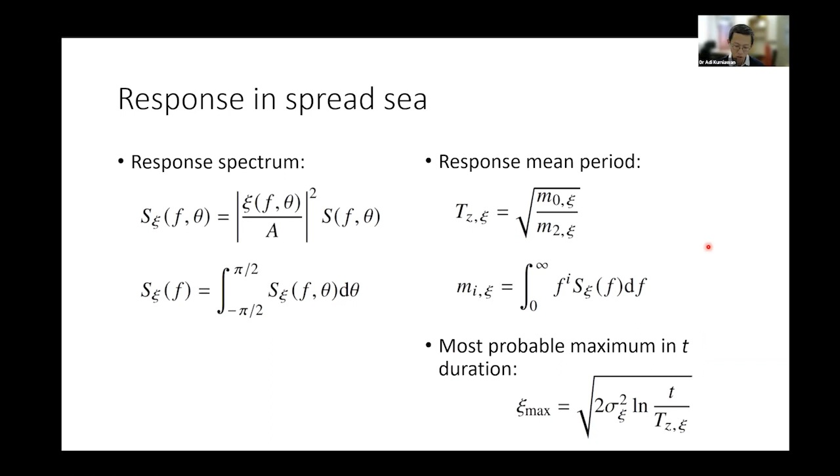Using that, we can estimate or calculate the response mean period, as well as the most probable maximum response for a given duration, say half hour, 1 hour, or 3 hours, depending on the requirement.

For the device that we are going to deploy, it is a reduced scale, so we are not targeting swell waves, but we are targeting wind waves, shorter waves in the region of a 5-second period. The overall length of the device is about 20 meters. From the bow to the center is about 13 meters, and from the mid to the stern is 8 meters. The device is about 7 meters wide.

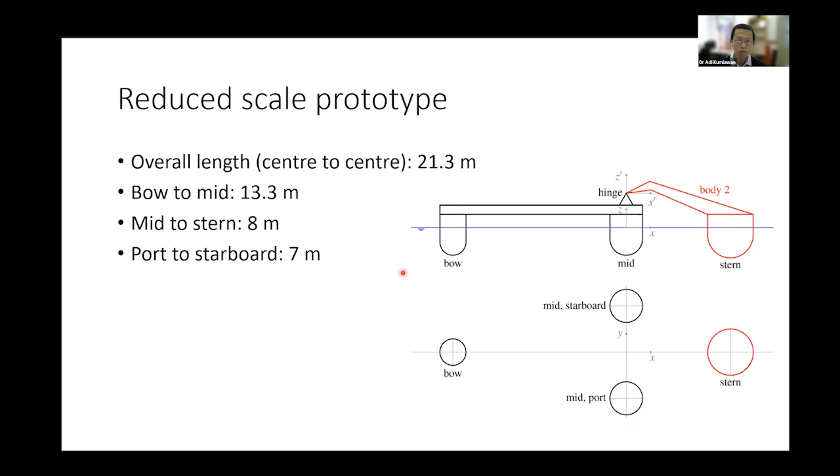We apply a JONSWAP spectrum with a standard peakedness parameter of 3.3. This is a typical wave condition to be encountered at the site, but more on that later. We can also study the effect of power takeoff damping.

Depending on the value of damping we apply on the hinge rotation, we get differences as we expect. In this example, on the left column we apply a certain value of power takeoff damping, whereas on the right column there is no damping, so the device is free to move without any resistance on the relative rotation.

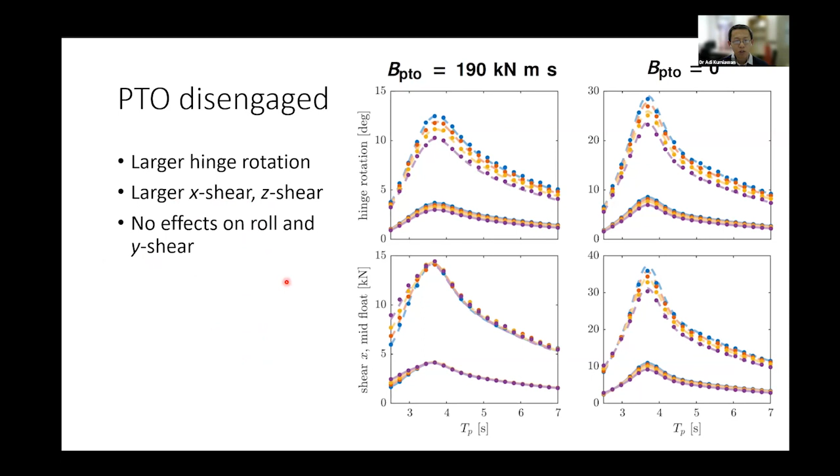Bit more on the site that we are interested in deploying this device. There's Albany, about 400 kilometers south of Perth. This is Albany, and that's the map of the region, and that is the place where we are going to deploy this device.

The water depth at the location is about 12 meters. It is sheltered from the Southern Ocean by this headland, because we are not looking for swell, which is longer waves, but we are interested in wind waves, shorter waves, because we have some fetch here, and this is just an ideal location for deployment for this scale of device.

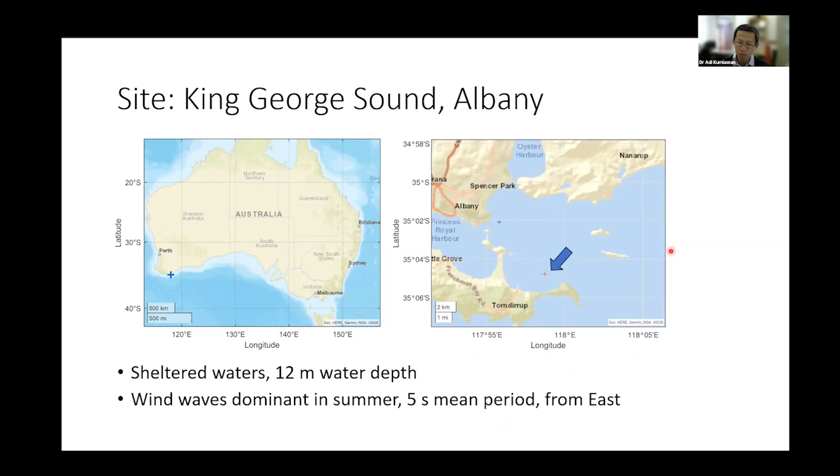The wind waves in the summer have a mean period of 5 seconds, and are predominantly from the east, so 90 degrees from the north.

With the model we have, we can also use actual wave data at the site to give us better confidence on our prediction, because we are interested to find out the expected loads we are going to get, the expected power and motion, and so on.

To do that, we deployed a wave buoy at this location since the end of 2020, and it's been collecting data since then. But we are also interested in getting a longer duration data set if possible, if there is any we can use.

Thankfully, there is another sensor operated by the Southern Ports Authority in Albany. This is an acoustic wave and current profiler, located not very far from the intended site, about 8 kilometers away.

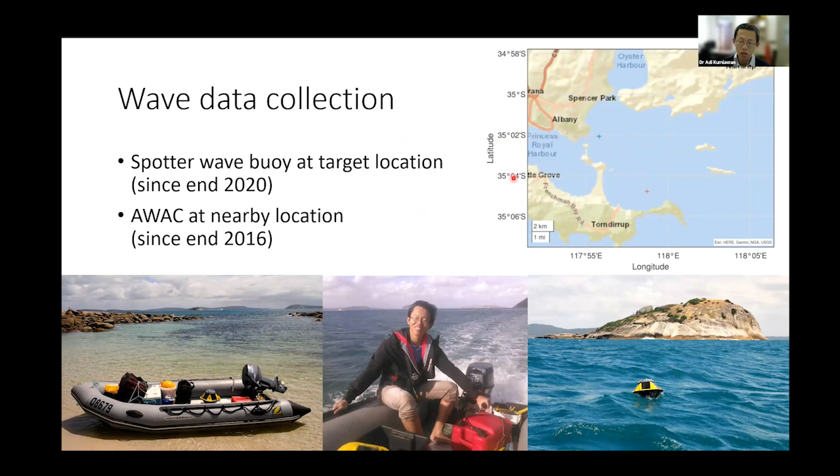We need to make sure we can use this data to give us confidence. So we did a comparison looking at significant wave height, mean period, peak period, wave direction, as well as wave power level at the two locations from the two sensors, and they actually agree pretty well, except the wave direction, which is expected because of refraction.

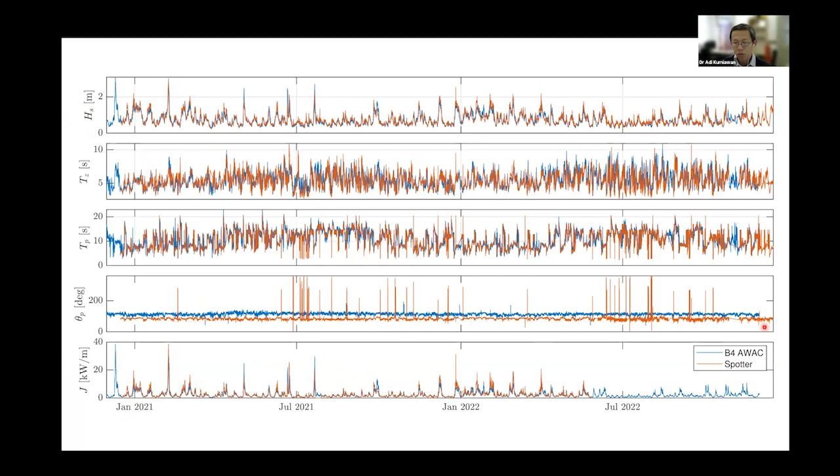In conclusion, this gives us confidence so we can use these two data sets interchangeably, and we use the longer data set to construct this histogram, or joint probability diagram, of the wave height and mean period. You can see here that the typical wave height at the site is about 0.5 meter and the mean period is about 5 seconds, and this is only for the summer months because we are interested to deploy the device in the summer.

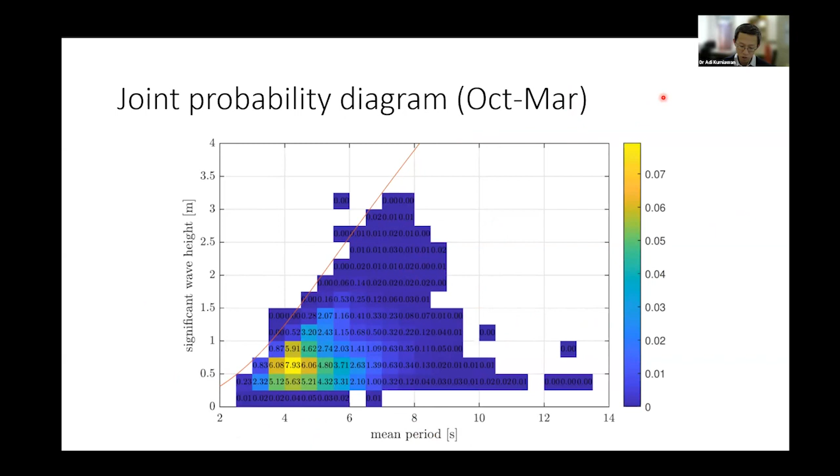So with the actual data and the actual spectra measured at the site, we can input that into the model and we can run it.

The model goes through all the data set, and we can plot the most probable maximum response values for any response of interest. We plot this with a color plot here, where you can see that the critical loads all happen for sea states close to the limiting steepness line.

We can choose some sea states along this steepness line and use that as our design sea states. Or we can also use the entire data set to estimate, probabilistically, the maximum response for the duration of deployment.

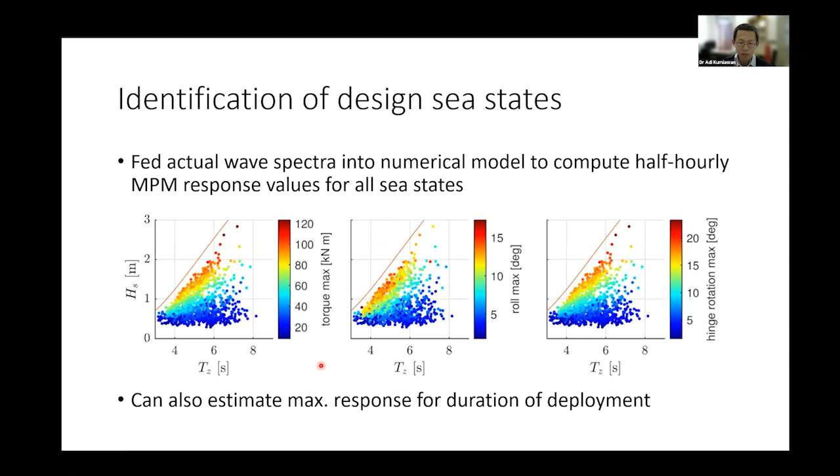So just to give a brief update on the ongoing plan for deployment. We have done seabed mapping at the site, and we've progressed from design to detailed design. Here's a snapshot of what we have currently, and it is actually ready now for fabrication.

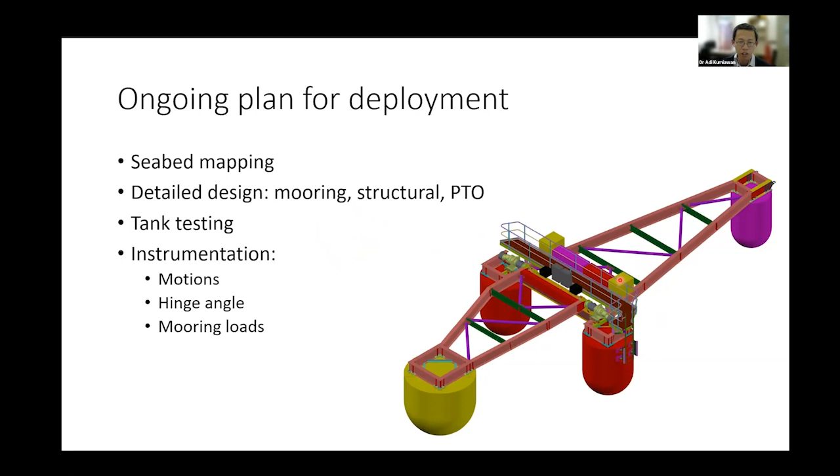We have also included mooring, structural, as well as the power takeoff, which is the main component of this device. And we've also recently conducted tank testing at AMC in February, and the analysis of the data is ongoing. We are also looking to deploy some instruments during the deployment so that we can get useful data telling us the motions, the hinge angle, as well as the loads at the mooring.

So this is a video from the recent tank testing that we did. And on the right here, some comparison between the measurements that we did and the predictions from the numerical model. So the agreement is pretty good. More on this later.

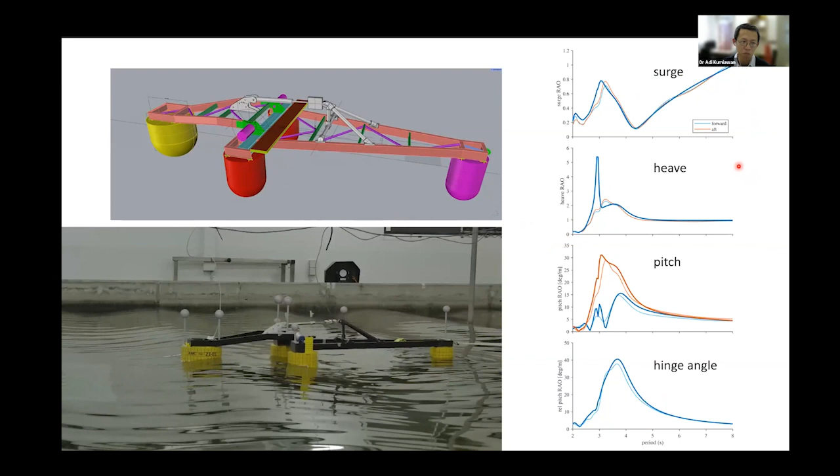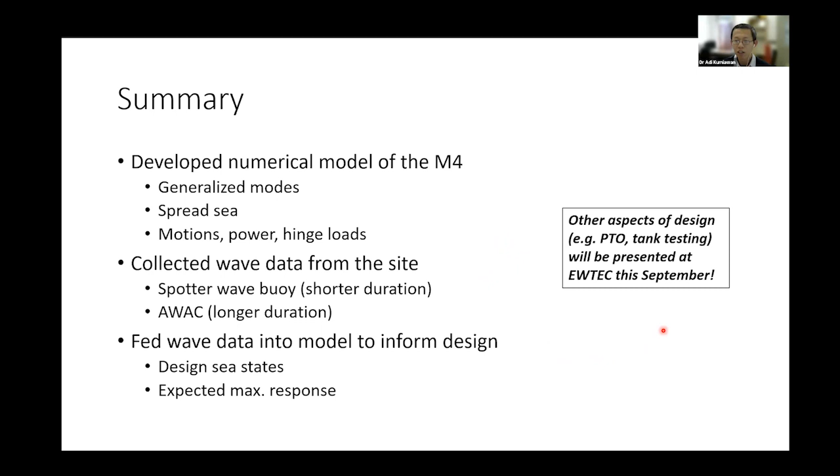We have a paper accepted for presentation at the Wave and Tidal Energy Conference later this year in September. So in summary, we have developed a numerical model of the M4. We have collected wave data from the site, and we have used this actual wave data to inform design. So other aspects of the design, power takeoff, tank testing will be presented at EWTEC this September. Thank you very much, and I'm happy to take any question.